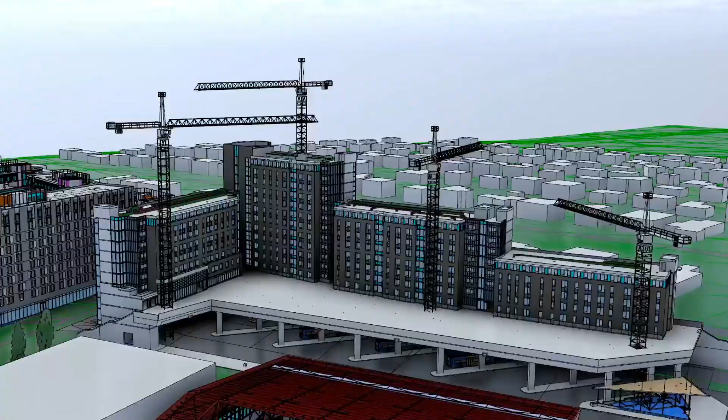Today, we'll be sharing a project overview from the University of British Columbia Exchange Residence and TransLink Mixed-Use Project as part of our virtual construction to digital twin solution offering. With every digital twin for construction, we are first and foremost identifying potential constructability risks to reduce the risk of schedule delays and setbacks to the project, while also generating direct-to-fabrication outputs whenever relevant.

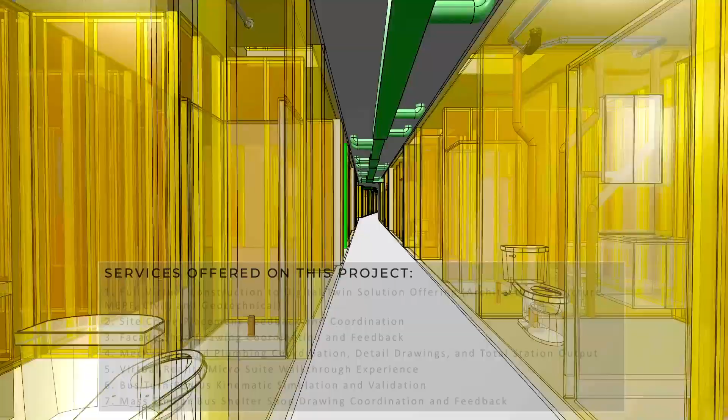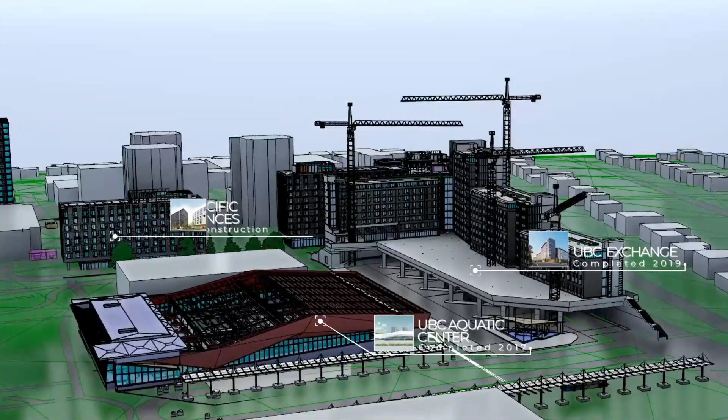In addition to the standard outcomes of our digital twin services, in this video, we'll be sharing some of the auxiliary construction site use cases where we leverage the existing digital twin to add further value to our customer and our project collaborators. We begin with the continuously developing campus digital twin of the projects we've worked on at the University of British Columbia in Vancouver.

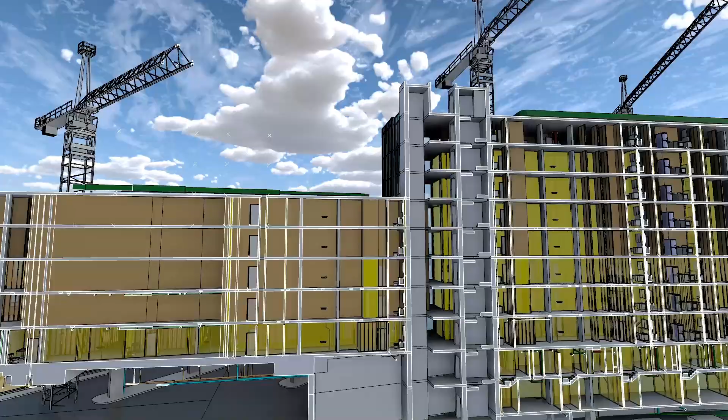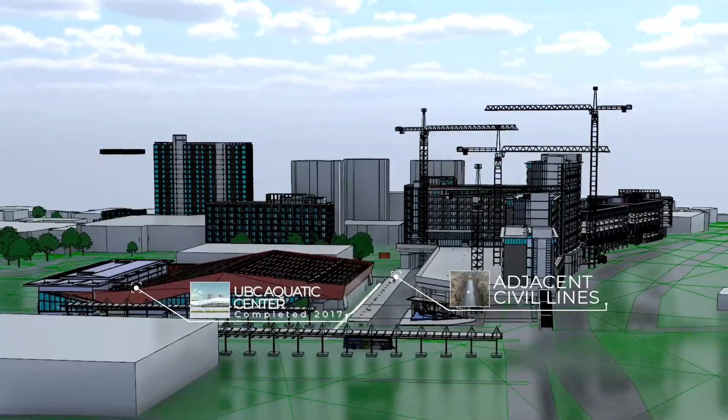In this project, we incorporated all disciplines of architecture, structure, MEPF, and civil to build a fully integrated model. Since we had existing civil lines from the adjacent Aquatic Center site, we were able to validate as-built locations of service connections. Due to the large footprint of the development, it requires 4 tower cranes to service the entire site. We aided the construction team to verify and validate crane placement for constructability.

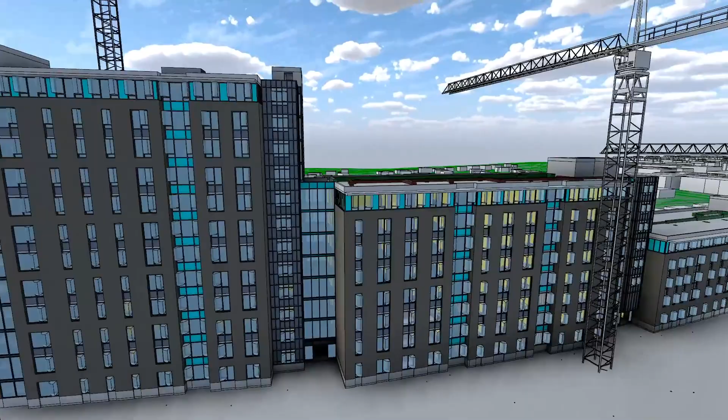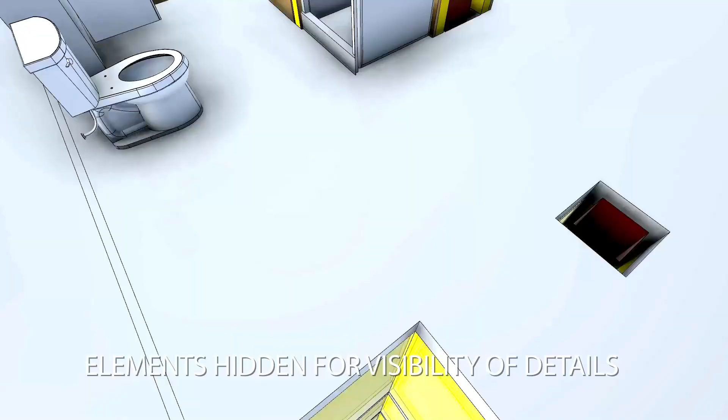Extensive coordination with the architect and facade fabricator were also incorporated on this project. Specifically on this project, we aided in the coordination of the concrete slab edge, concrete curbs, rough openings of the windows, and the brick exterior throughout the project. Following CADmakers' detailed design for manufacturing and assembly methodologies proved particularly helpful coordinating corner interfaces where the brick and windows meet, and ensuring there was a 4-inch clearance behind the windows for installation.

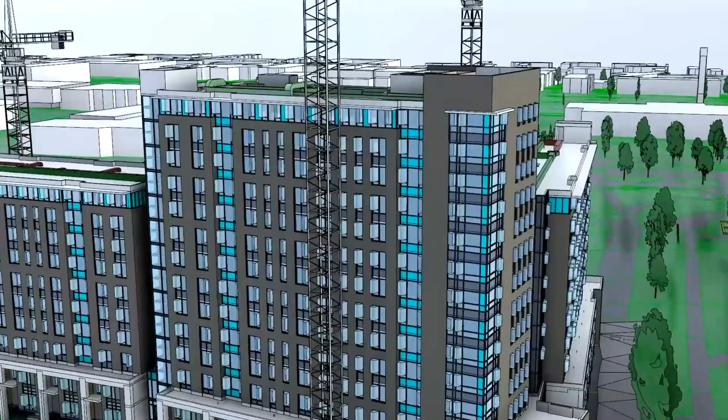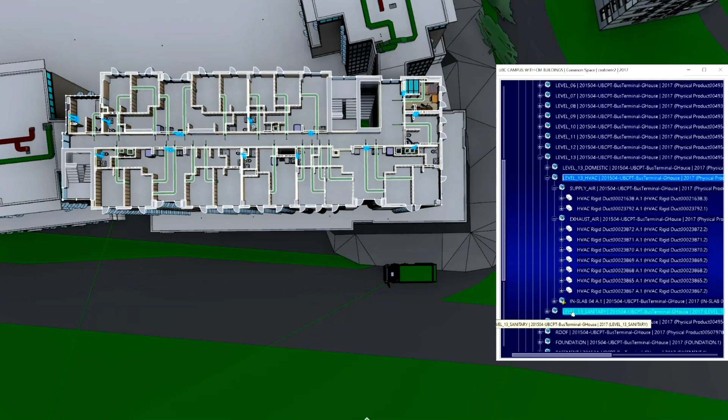One of the main challenges of this project was the coordination of the horizontal in-slab ductwork and vertical plumbing risers throughout the tightly packed units in the tower. From the initial layouts provided by the design team and integrating the detailed stud wall buildup, we were able to coordinate and optimize with the trades the typical suite layouts to eliminate construction coordination issues while also improving consistency by reducing offsets and overall time required to install.

After optimizing layouts and resolving issues, we produced slab edge, in-slab duct layout, and canning drawings for concrete detailing, sheet metal, and plumbing contractors. To maximize efficiency, we also produced inputs for the total station for canning layout.

Zooming into one of the micro-suite units, we conducted a side project where the owner wanted to leverage the construction model to perform virtual reality walkthroughs with various project stakeholders to visualize the functionality of the layout. We built an interactive walkthrough environment in Unreal Engine using a Datasmith model conversion process with added rendering textures.

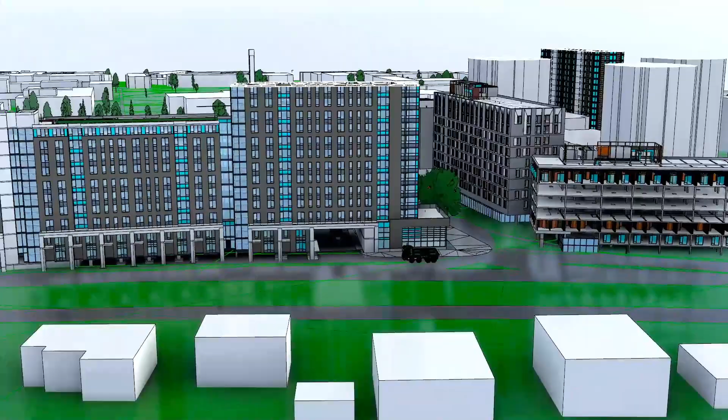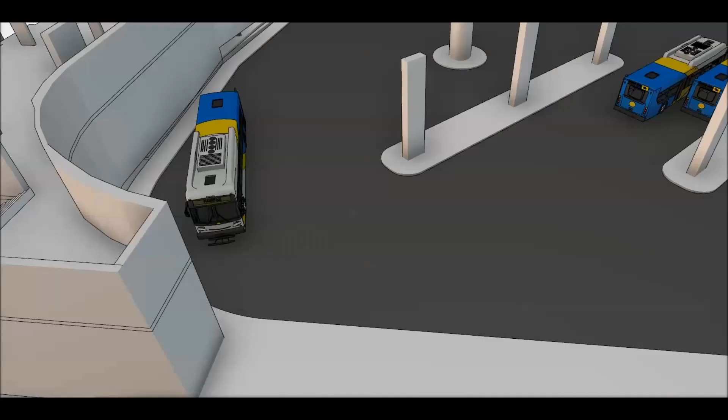Moving into the unique integration of a bus loop at the ground level, another risk was identified due to the associated column spacing and clearance. As a value add coming from the digital twin process, using rules-based scripting, we created a kinematic bus turn radius simulation to validate that the buses could appropriately turn into the terminal with the required minimum spacing.

Lastly, we didn't stop at the building, but also incorporated the contextual components of the bus loop, like the mass timber bus shelters, to give feedback on the fabrication shop drawings.